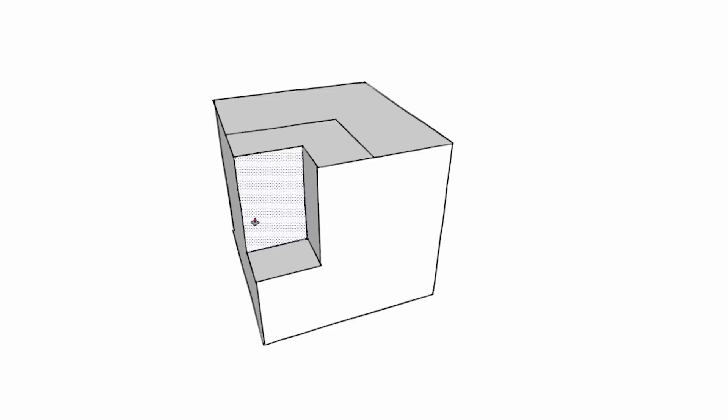We're building an architectural model inside of SketchUp. We've put in our exterior walls and interior walls on the first floor, and we have a reference image. The next thing to look at is doors and windows, which I'm going to lump together and use the term openings. Forgive me if you use that term differently, but in this case, I'm referring to doors and windows as openings in the wall.

I'm breaking this into two different pieces. First is the rough opening, which is the hole we're going to actually punch through the wall. Second is actually putting door and window components into those holes.

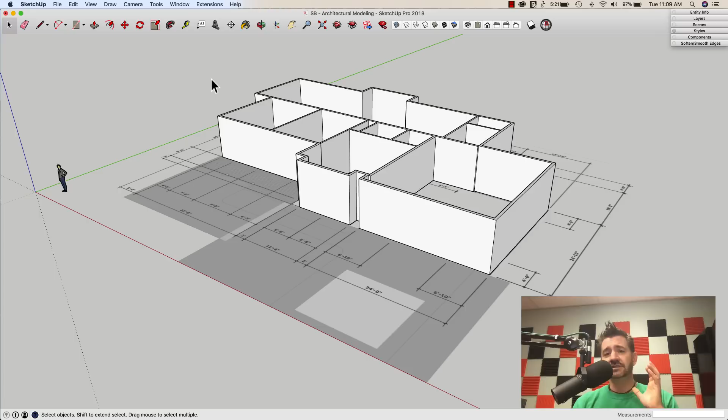I know there are extensions out there that will automate this process and pull it all together, and that's great—they're awesome extensions. I highly recommend you use them, especially if you're doing a lot of this. But in the interest of building your skills, we're going to walk through this process with just SketchUp tools. So feel free to call out those extensions in the comments, but in this walkthrough we're sticking to the basics.

So let's hop on in. First thing I want to look at here is my reference image. It has door and window callouts, but I can't see them, so I might want to turn on X-ray. X-ray is going to give us the location of those openings.

I'm not going to snap to these because they're kind of messy lines, so as I do this input I'm going to use the dimensions called out here. Another thing not on here—just for cleanliness of the output, I didn't want a whole bunch of extra information—I don't have callouts for the door or window sizes. That's fine, I'm going to make this up or supply this information as we go. It's not a complete drawing; it's simplified for the training process.

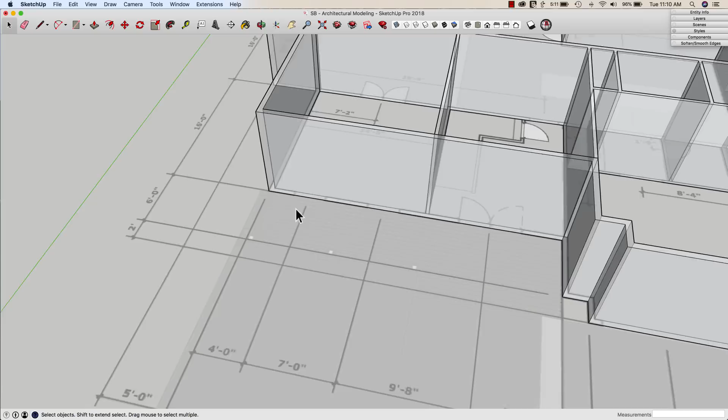So let's hop in and look. Right here I have a window—it's about a 3-foot window, and I'm fairly certain it's a 4-foot tall window. So this is a 3040, something like that called out. Now, there's a relationship between actual component size, your door or window finish size, and the rough opening required, but I'm not going to get into all that. For this window, I want a 3-foot wide, 4-foot tall window—a 3x4 hole cut in this wall, with the top of it at 7 feet. Who cares how you come by the numbers—we're going to look at the process of actually putting that window in.

We're going to walk through this a couple different ways, starting with the basics. First I'm going to double click into the exterior wall space to go into that group. I'll come right here and draw over 4 feet—type 4 foot, enter—and that puts me at the middle. Then I'm going to draw a line up 7 feet.

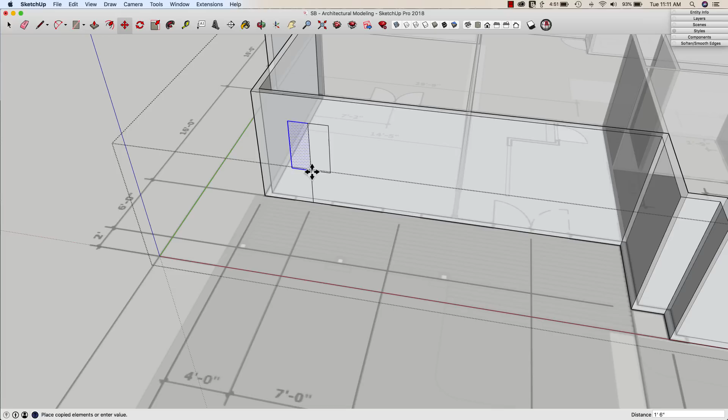There's a couple ways I can go from here. This is a 3-foot by 4-foot window, so I could draw a line to the right 1.5 feet, draw that down 4 feet, and draw it back. Then I could select this surface, move, option-copy it over there, get rid of my 2 redundant lines, and pull that in. That's an option—that is a way. I do have a hole in the wall now. That does work.

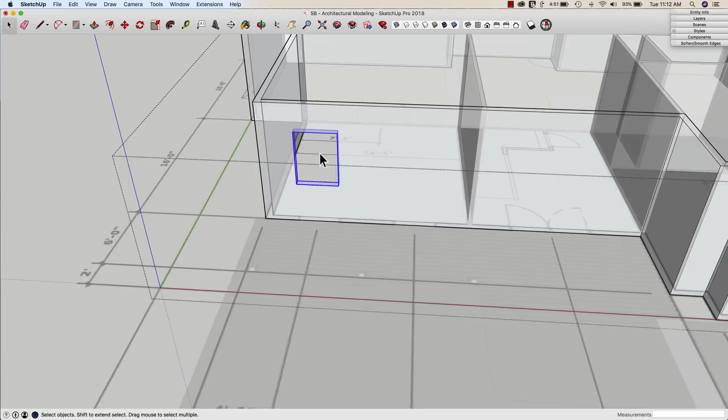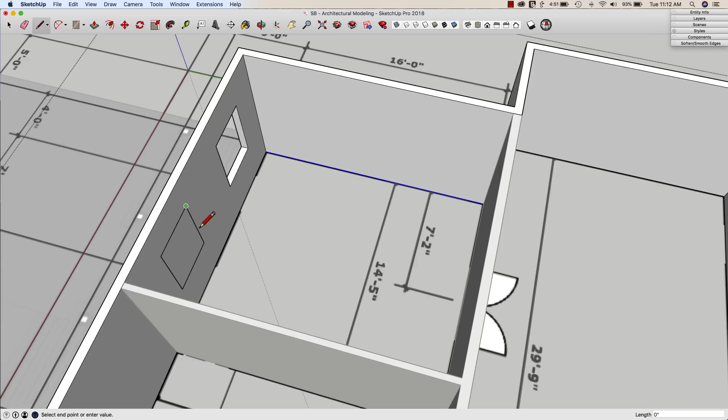So one of the things I can do right now is, once I have this hole in here, I have the same opening 7 feet over. I can grab this, option, slide to the right 7 foot, enter, and you'll notice it looks a little different. If I turn off my X-ray, yeah it did copy it over, but it did not punch the hole in the wall.

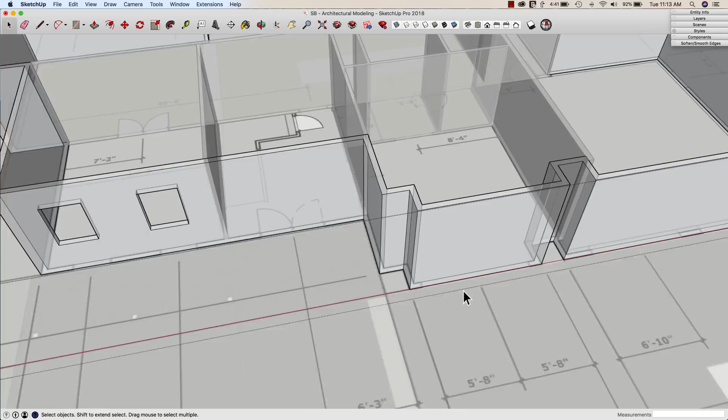So this is a 9-foot wide window, that is a huge window. I would assume it's going to be a little bit taller too, so it's probably not the same here, probably same header height though. Same with doors, the doors are kind of what's going to set my header height, my opening height.

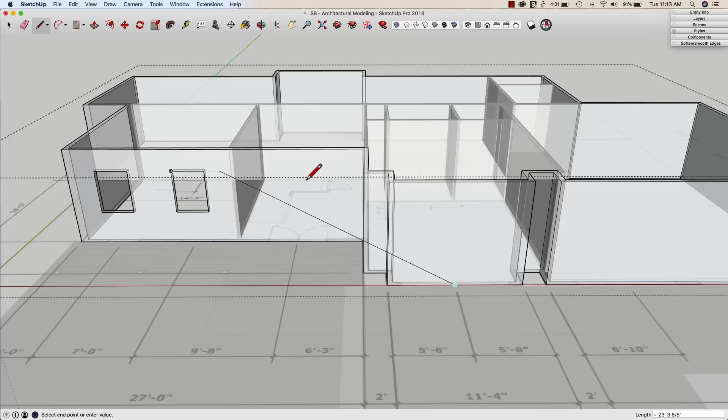So one of the things I can do is come up with a reference for the top of the opening. If I was to come in here and wanted to draw this up, I could reference this point far away to kind of come up to where the top is going to be, so it'd snap there. That would work, but that can get a little bit messy as you're working through here.

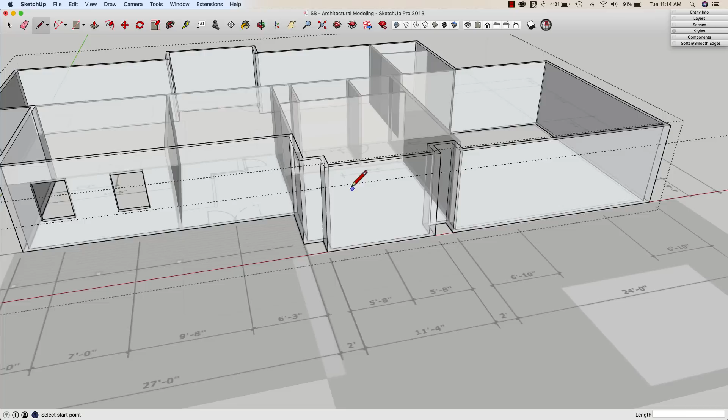Something I do see a lot of people do is they grab the tape measure tool, grab their line, and pull it up. So if it's 7 feet, 7 foot, enter. That gets me a reference line right here on the wall that I can snap to. Downside of that, of course, is I have openings on a whole bunch of walls, so that would mean creating a bunch of these reference lines. Not a bad thing, but it is some extra work.

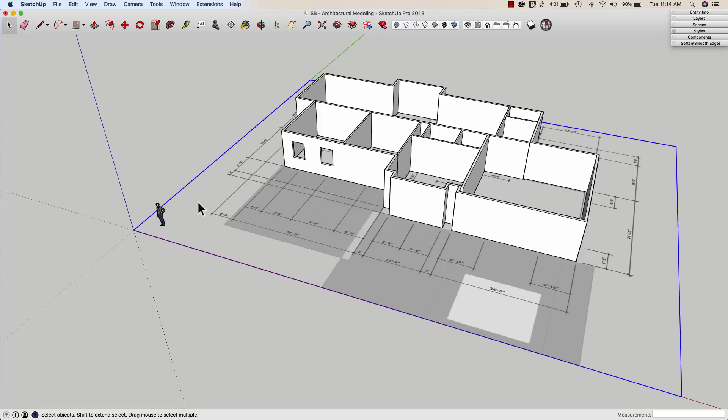So what I want to do is show you a quick tip for setting your top of opening height for your entire model all at once. I'm going to come out here, outside the group - here's my exterior wall, interior wall group, totally separate. And what I'm going to do now is draw a rectangle on the ground. This is not a precision input thing, just bigger than the model. I'm going to triple click on this geometry, right click, and make it a group.

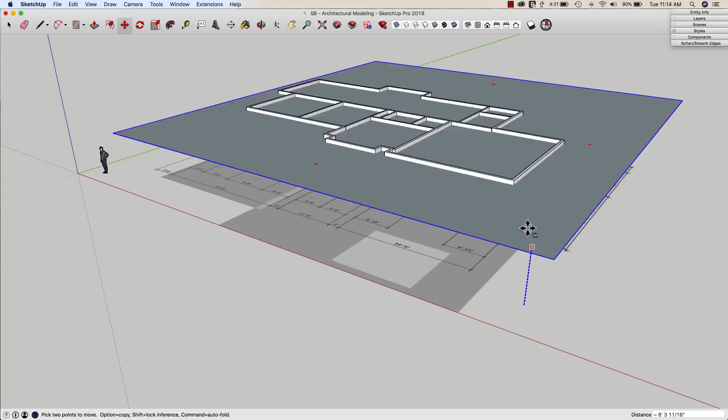All I'm interested in is isolating this geometry, nothing else to it. So what I'm going to do now is grab it and move it vertically. I'm going to hit my up key to lock to that vertical reference, and put in my header height. Again, keeping this simple, nice round numbers, 7 feet, enter. So that created that surface at 7 feet.

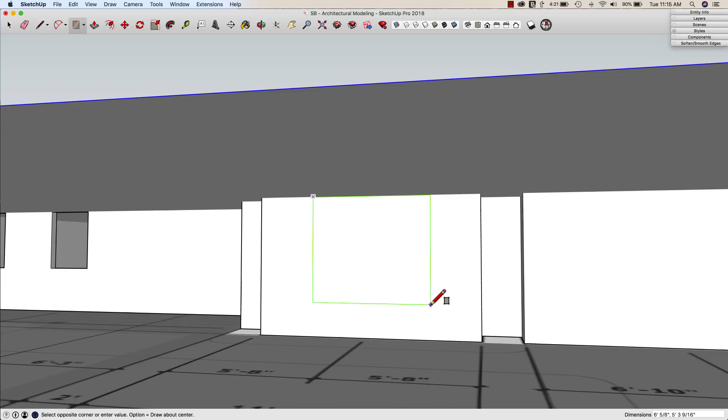So if I wanted to, if I came in here and wanted to draw this opening, I could click to that intersection and bring my opening down. What's the downside of that? Well, I basically have to wedge myself between my drawing and that reference line. Because if I come up here, I can start my rectangle, but I can't go down unless I flip underneath. So this is not an ideal setup.

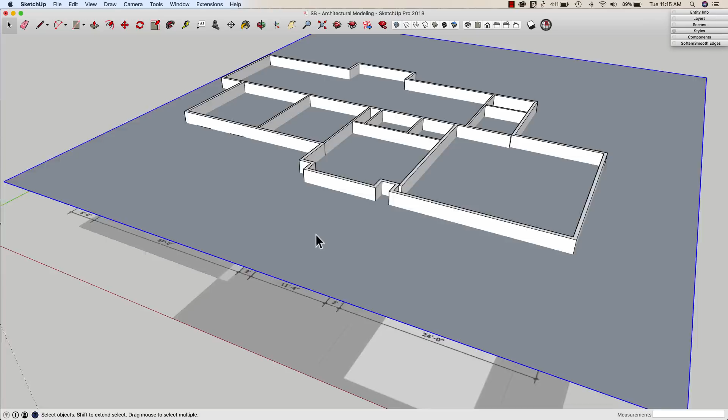So there's a couple things I could do. I've shown this to people and they say, well, can you just make it clear, fill it with transparent? You cannot, because transparent materials are still materials, so that surface would still be there, that face would still exist. So what I'm going to do is double click into this group, select this surface, and then right click and say intersect face with model.

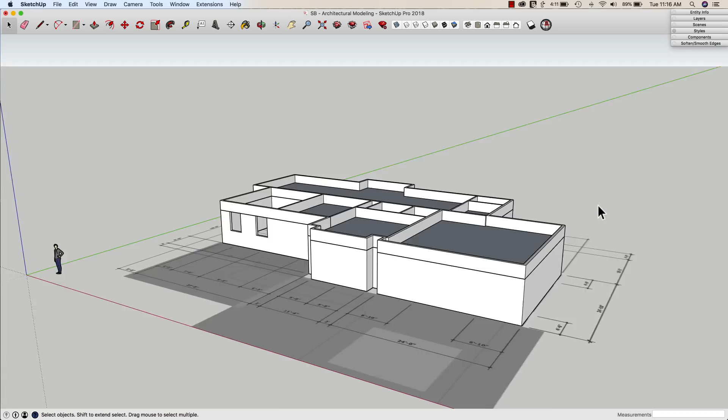What that's going to do is break this surface, not the walls, but this surface every place it hits one of those existing walls. Now what I can do is delete these pieces on the outside, and if I look at that, I have this nice sweet line going all the way around for the top of my doors and windows, the tops of my openings.

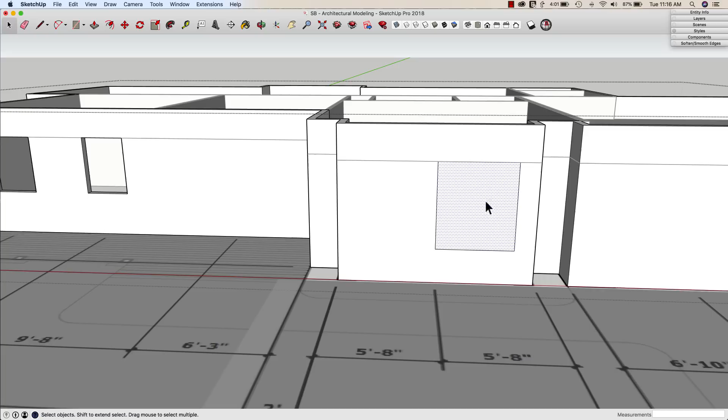So now when I come in here to this group, I can come right here and draw a rectangle. I'm going to draw half of it again, and I'll say this is 4.5, because we know it's 9 foot total, and I'll say it's 5 feet tall. Then I'll take that and option, offset, boom, and push that through. So kind of a nice option to speed up the input of your doors and windows.

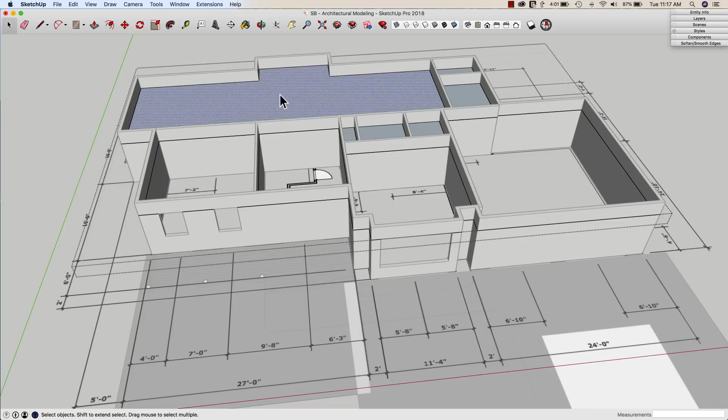Of course, I didn't delete the inside surfaces, but I could double click in the group, get rid of all these pieces here too, and that's going to give me those lines on the inside too. I would actually probably want to do that with a separate group on the interiors, because I'm going to have probably a different header height than what I have on the outside. But you can see that is a quick and simple way to get that reference in there.

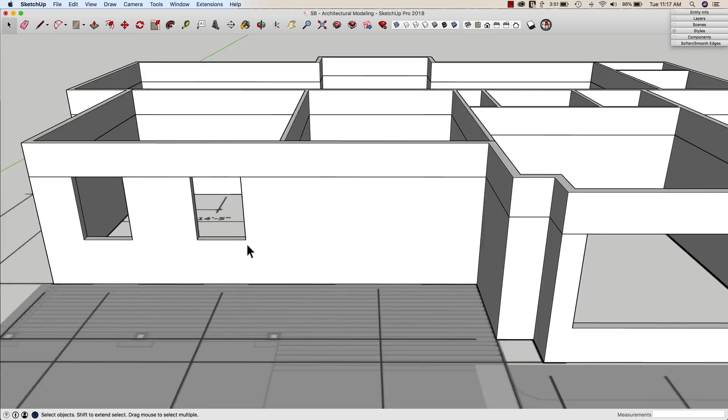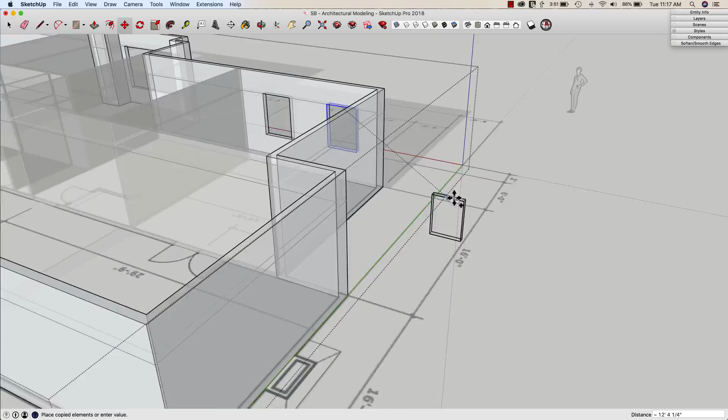So from there, it's a matter of, wherever possible, copying an opening. One more tip before we wrap this up is duplicating and reusing these openings wherever possible. In this case, I'm going to go into my exterior walls, grab this opening right here, grab it by the middle of this point, hit option to copy it, and come over here and drop this right here on this line.

I didn't come in and make a reference first, so maybe I'll come in here right now. I'll say 4'2", and that's going to give me a reference point right there. I can move that again, grab it by the midpoint, and get it lined right up with that point.

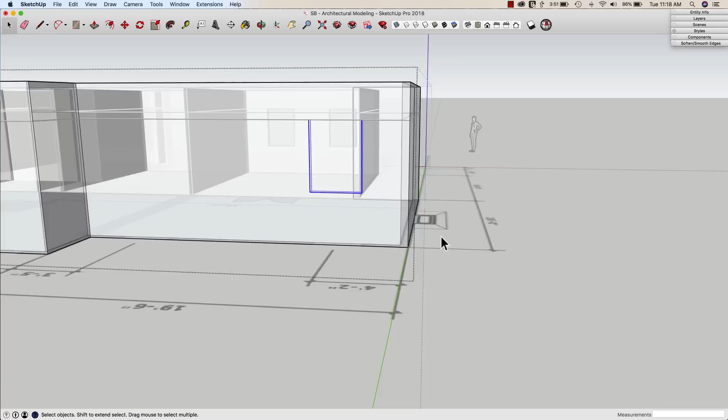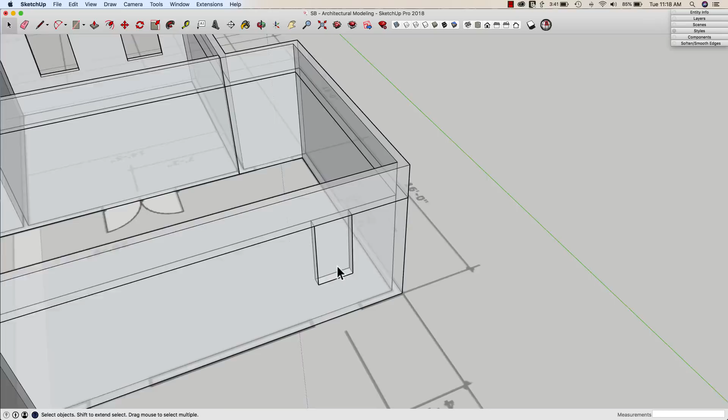One of the things I can do at this point, if this is a different size window - say this is supposed to be a 2-foot window - with this selected, I can scale, grab it, option, start sliding it, and say I want that to be 2 foot and hit enter. What that's going to do is resize along there so that now this opening is 2 feet rather than the original 3 feet. So copying and reusing that geometry with scale makes it a lot easier.

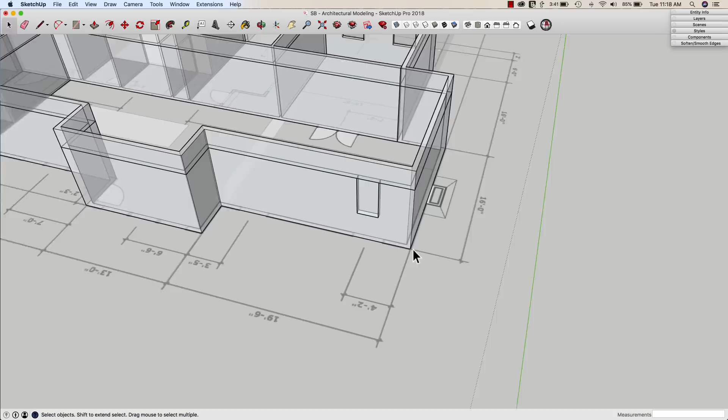Something else, again, this depends on the information you have. I have center line references for all my openings here; they all go to the middle. If you have plans that pull to the edge, it makes it so much easier, because if I know exactly where this corner is, I can come over that dimension and just draw my rectangle down from there. That really speeds up input. But a lot of plans come dimensioned to the center, so you have to work with that, and in that case, copying an existing opening and resizing it is a quick way to do it.

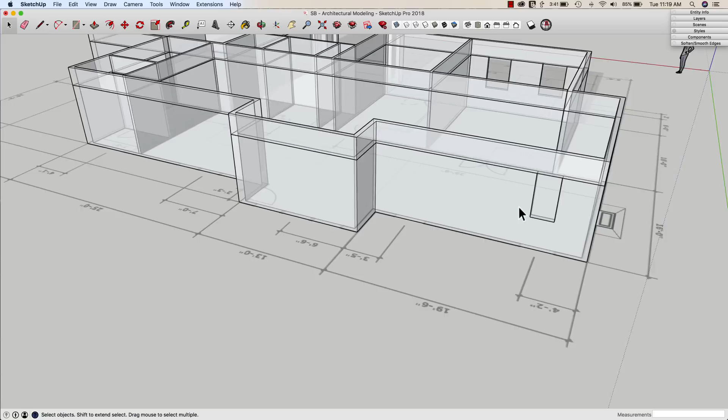So that's a couple ideas you can use when inputting doors and windows into your model. I know I didn't hit everything every way you could possibly do it, but this is something that's worked for me. Hopefully a couple tips in there help you with doing the same process.